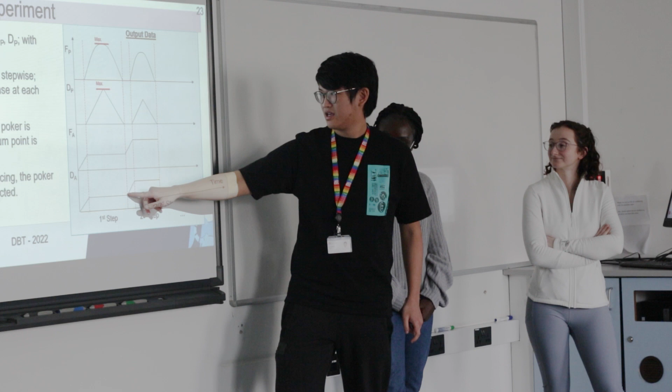The design, build and test project is the first real hands-on experience of research that the first year CDT will have. The understanding of how to conduct research not only on a theoretical level but also on a practical level - so this is what I see being the role of the design, build and test course.

The challenge is growing up and starting to behave like a researcher instead of as a student. I mean, in Italy we would say stop expecting the ready meal and start to cook it yourself, probably.

Doing research on the ground, making the mistakes, is arguably invaluable, particularly given you're about to do a 3-year PhD. I think the project is one of the highlights of the CDT, and we'd always had really good feedback from previous years.

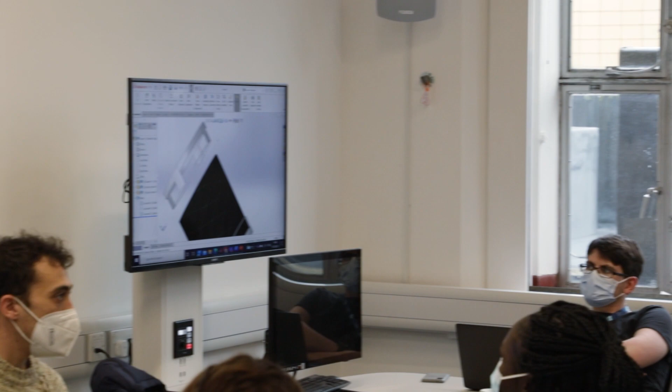It's very nice to work with a large group of people, mostly because most of us have different backgrounds, so it's a very good mix of people to work with.

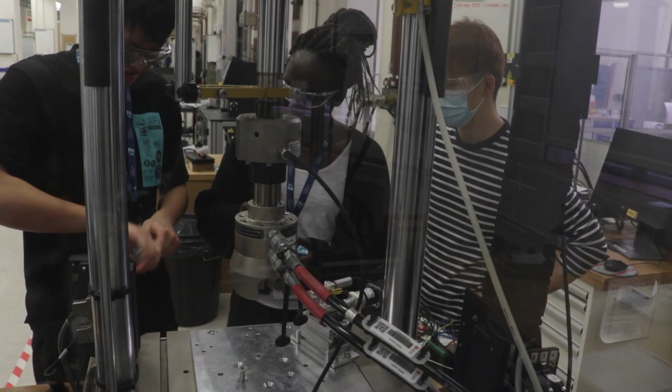It's giving us the opportunity to have hands on a proper experiment ahead of our PhD project.

So this year we are substantially creating a demonstrator for one of the research activities that is going on in BCI. And the project is a structural project. It's substantially a cylinder under compression with a side load. And we will use the results to predict the buckling of the structure.

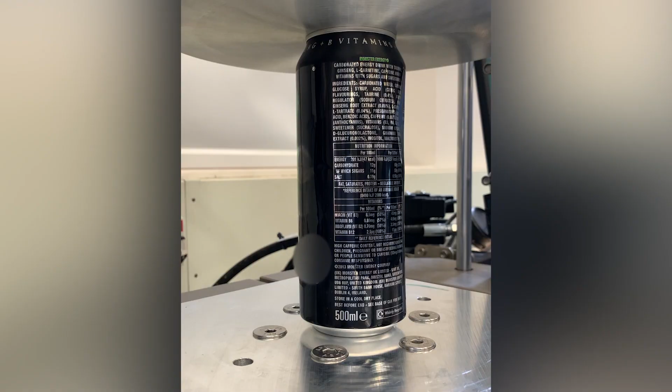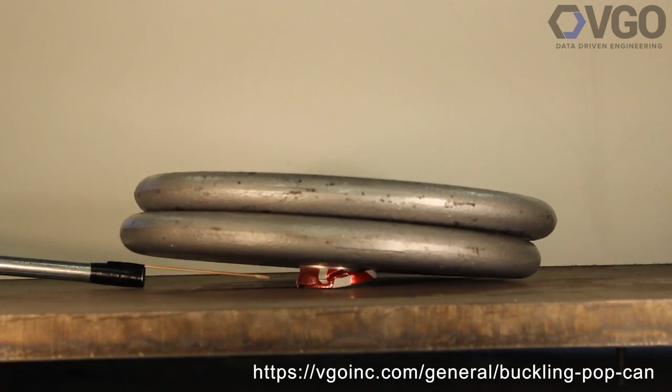There's been experiments conducted to study the stability of cylinders, but most of them are based on isotropic materials. So what we are doing is applying an axial load on the cylinder, and at this axial load apply a lateral poking force that would induce the buckling and see at what point the cylinder is going to buckle. So the aim of this is to come up with a stability plot that would then be used to predict the buckling stability of composite cylinders.

There's not a lot of literature available for composite cylinders. There was a paper that looked at an aluminium can and used the same method, probing it to find the buckling load of the can.

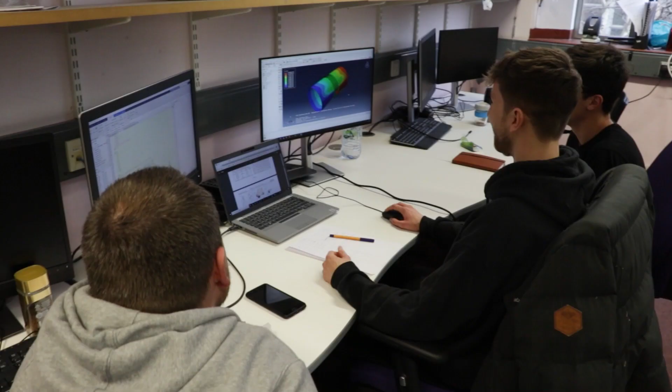So we tried to recreate the geometry of the can on the FEA model. Initially we needed to model different layups and different materials to give the manufacturing team information in terms of the buckling load. We also needed to make a perfect cylinder model to test our actual modelling method.

So I'm part of the manufacturing team, so we are essentially making the cylinder. Our job is to manufacture the cylinder as perfect as possible. Obviously that's not going to be the case - there's going to be defects and imperfections introduced, hopefully not too many.

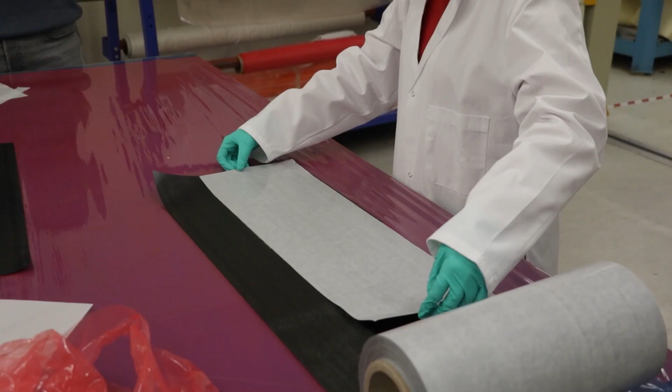We first had to work out how we were going to actually physically lay up these plies and then curve them around our mould. We already had our cylindrical aluminium tool - its length was 750 millimeters, which meant that we could get 2 cylinders on the tool at the same time.

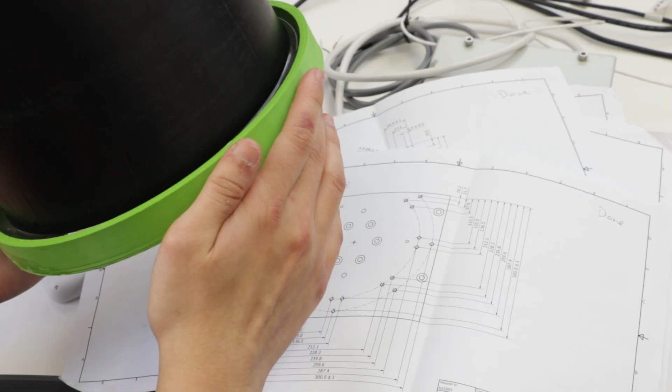So my team's task is divided into 2 main objectives. The first part is to actually design the testing rig - a rig that can apply this axial load, measure it, and then apply the poking force and measure that one as well. And then to actually conduct this test.

There are no books at all - not to design a machine in general, but especially there are no books to design a machine for a test that no one has ever done.

The CAD designs and bringing together all those mechanical engineering related things, that's not my field. But fortunately we have an expert in mechanical engineering who really likes doing these things.

In order to get an accurate result, we need to design a test rig that has a step size of 1 micron and moves in only one direction.

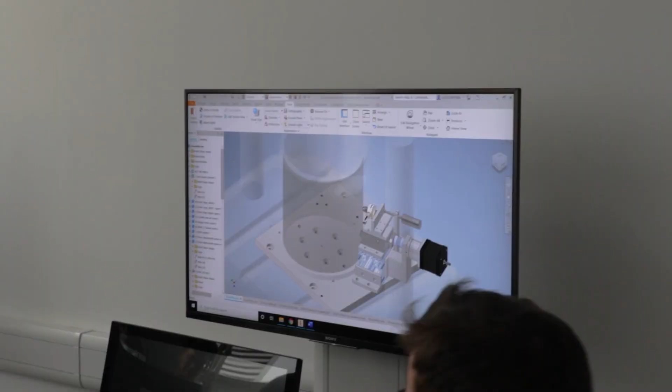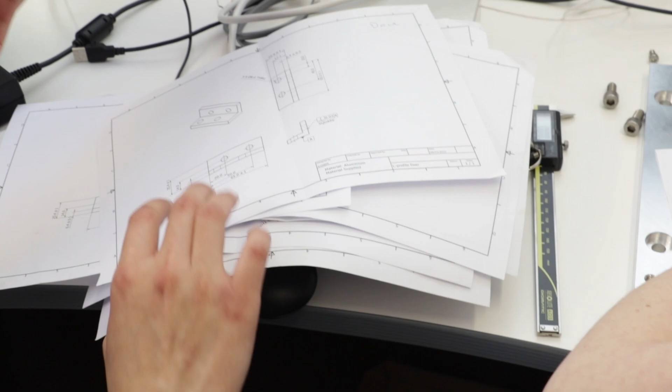We need to collaborate very closely with the other group because we have some very important parameters that all the groups need to agree with - for example, the diameter of the end cap of the cylinder. It takes a lot of time to modify our design.

We're not yet experienced hand layup operators, so that's going to be a big challenge, laying up very thin carbon fibre prepreg around a cylinder. Actually, I don't think we'll realise what a challenge that is until we get in the lab and start doing it ourselves.

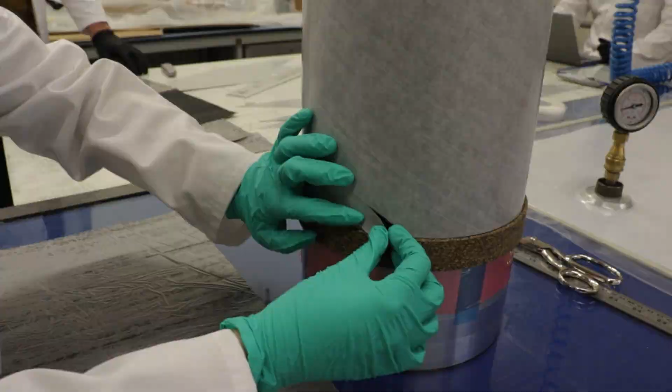So we paired the plies up in terms of their fibre direction. Pairing the like fibres together meant that the cuts of prepreg were all the same dimensions.

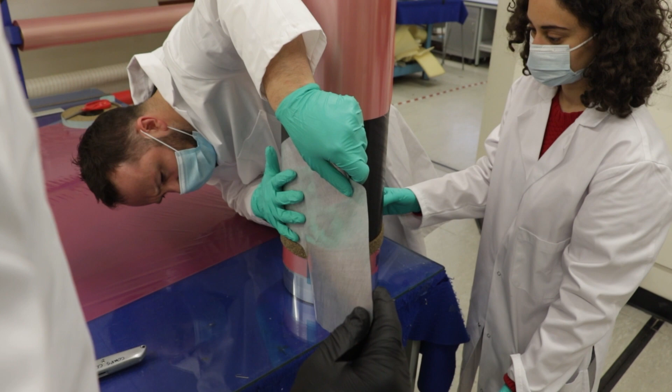So after we'd laid up 2 cylinders onto the aluminium tool, we then had to bag it, which did involve rolling the tool along the table. And from there, it went into the autoclave.

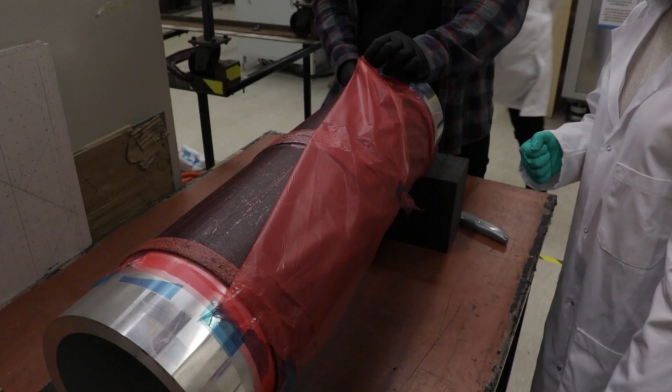Once we had 2 cured cylinders, we went into potting, which did involve applying epoxy rings around each end of the cylinder. One issue we encountered was getting the cylinder completely centered within the mold. So to do that, I designed and manufactured some arms that would perfectly hold the outer diameter of the cylinder in place.

I would say our work was very front-loaded. The testing team can't do their main job until we've done our job, and likewise for modelling.

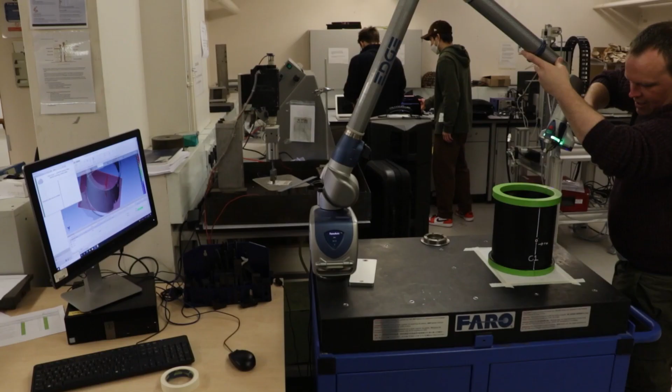So the next step was characterising the imperfections in the manufactured cylinders. We used a 3D scan to give us a cloud of data points for the outer surface of the cylinders.

Once the imperfection signature is in the FEA model, we're able to simulate the actual experiment that the testing team are going to do. So we can give them data such as where to apply their strain gauges based off where the cylinder is weakest and most likely to buckle. We'll also be able to tell what the theoretical buckling load of this exact cylinder should be before they take it to testing.

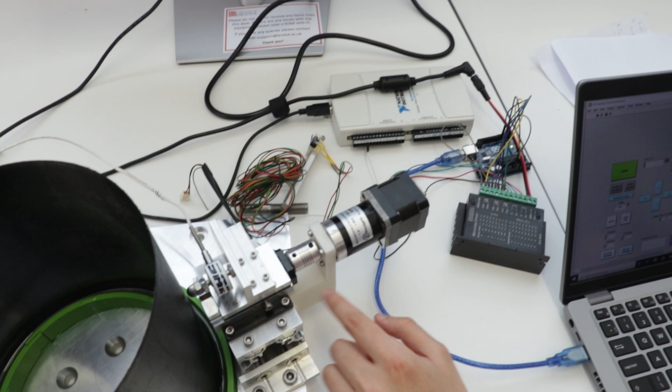When we sent the original design to the workshop, they said we don't have enough material, we need to order it, and it's going to take a lot of time.

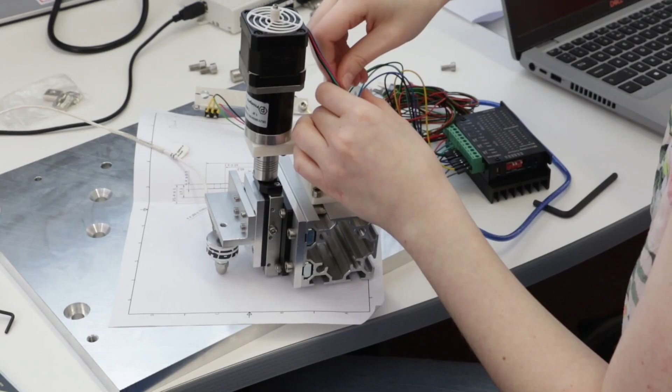We found some scrapped aluminium from a basement and changed our design based on what material we have. It did the job and the result is pretty good. Our final test is in 2 weeks and now we have all the mechanical parts ready.

I do a lot of Kirby's during the testing, which improved my entertainment. I ended up with like 20 Kirby's.

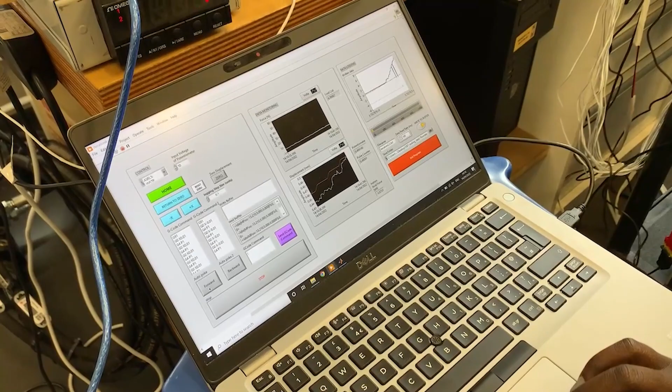Originally, the steps were 5 minutes each, so the Instron would move like 0.1 millimeters at a time and then hold for 5 minutes. So it gave plenty of time to draw.

At first, in the literature, they designed the experiment with force control, but due to safety reasons, we changed to displacement control. We didn't want it to crush the specimen.

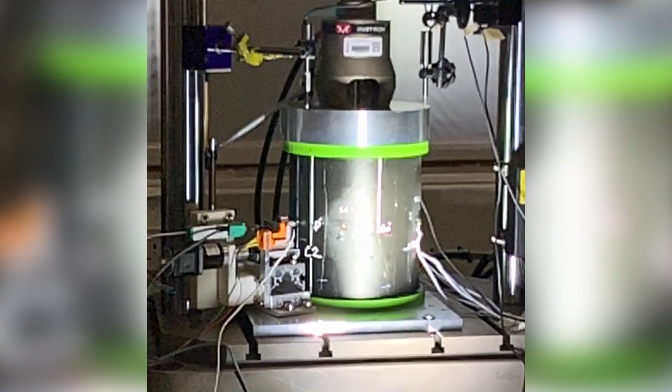Yeah, the machine gun load, which is fascinating and bizarre and definitely bad. What we managed to figure out was that as it was going down in displacement control, the Instron caused it to buckle, which caused the cylinder to contract a little bit, making it think it's gone way too far down in the displacement, so it would reset. It just got caught in a feedback loop, which was terrifying.

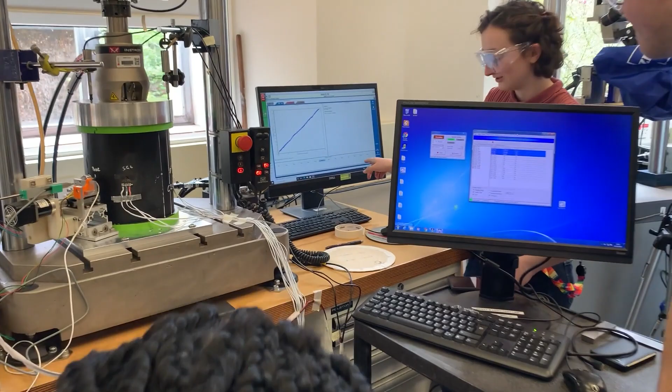Yeah, I would say we got pretty decent results. Overall, I'm quite satisfied with what we got.

We spent the last couple of days interpreting the data, creating stability landscapes and comparing those to the results we got from the FEA modelling. It kind of matches within reason. There's something there to work with. It's hinting that we're on the right track.

I feel like we worked together pretty well as a team. I think it was useful to get to know the technicians on a more personal basis, so that if you ever need to talk to them going into your PhD, you know who to go for advice.

I would say one of the most important things I've learned is to be more flexible with what you expect of an experiment. Things will and probably can go wrong very easily. Things will always take more time than you think.

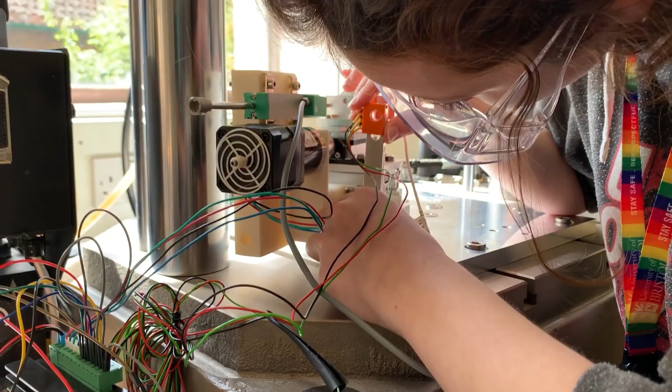I think if we had the chance to do it again, we would spend much more time on planning the experimental procedures and do it better.

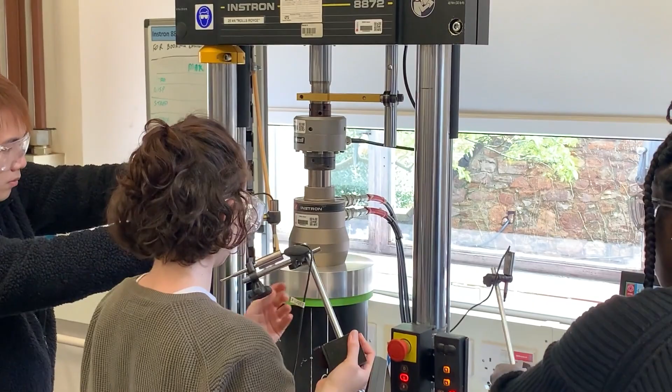For me, it was all quite a large learning experience, but it's been good. It's something I knew that I needed for the PhD.

They had a good first attempt at modelling work, especially since they don't have that much experience with the software. They got to grips with it pretty quickly.

Yes, it's about building and testing it and seeing the results, but the real things you take away from it are how you work with people and how you go around interacting and planning, more so than the actual making and testing of it. And I think in that regard they've done a fantastic job.

They did better than what they think. No, I mean, they did very good.

They showed that they are understanding the problem. They showed that they put their brain into it and tried to come up with a solution. Again, not only learning from the book, but learning from experience.